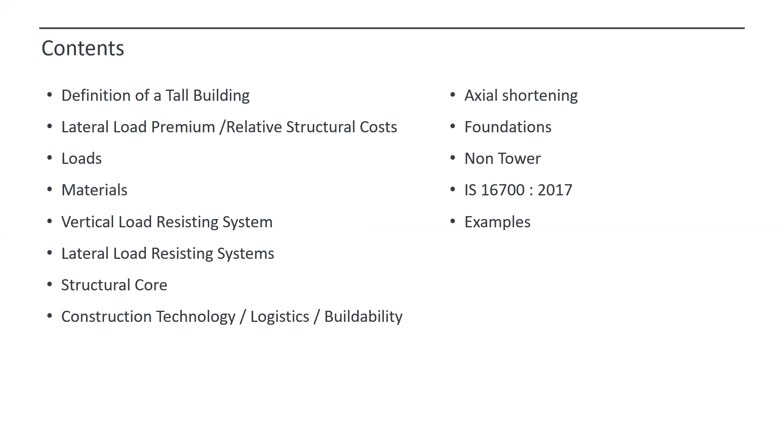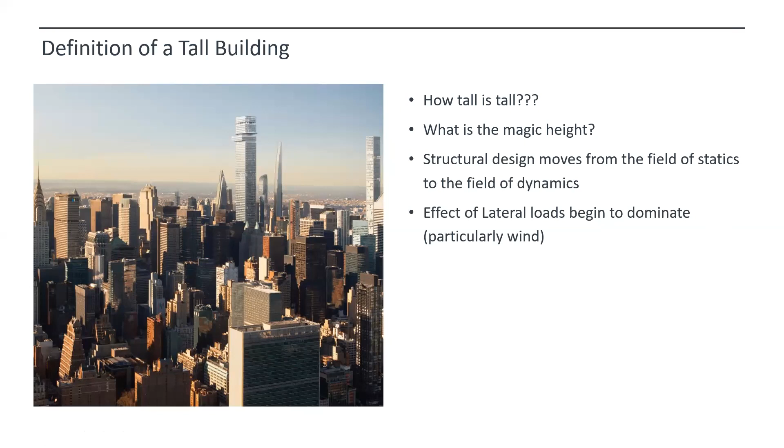In reality, there is no magic height or clear-cut definition in place. It usually depends on various factors, and the most important is the time when the structural design moves from the field of statics to the field of dynamics, and the effect of lateral loads, particularly wind, begins to dominate. That's when we say a building is tall enough.

As you can see, a floor system, whether it's a flat slab, a beam slab system, or any slab, whether it's 10 floors or 50 floors, the cost of that floor system is almost the same at every floor. Whereas the cost of the gravity columns is linear, it increases linearly with height. Whenever stories get added, if n stories get added, n number of times the repeated load gets added, so it's a linear function.

Whereas the overturning moment that happens at the base of the structure due to lateral loads or wind usually increases in proportion to the square of the height, so that's quite an exponential distribution. And the deflections increase in proportion to the fourth power of the height. So that is the impact of lateral load.

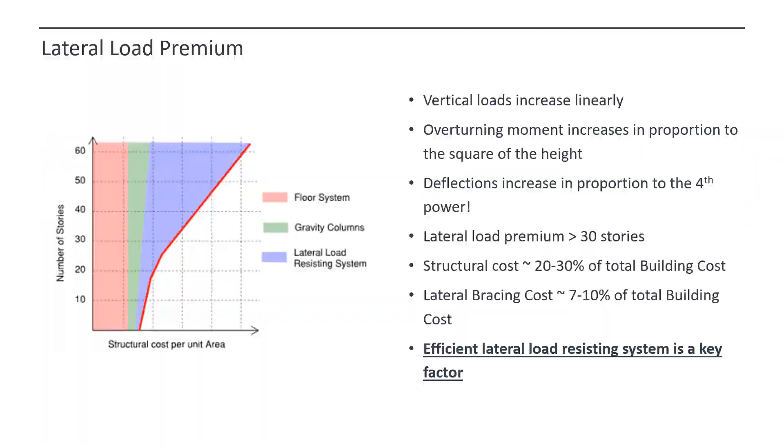Starting with its own gravity load, the self-weight, the finishes, the live loads, we have the wind loads, then there may be some accidental loads. The settlement of soil or the foundations can cause additional loads on the structure. Then we have the seismic loads, or depending on whether the building is built in concrete, the concrete has a tendency to shrink, and this shrinkage, depending on the restraints in the building, may impart some additional loads on the structure. And one is load from temperature.

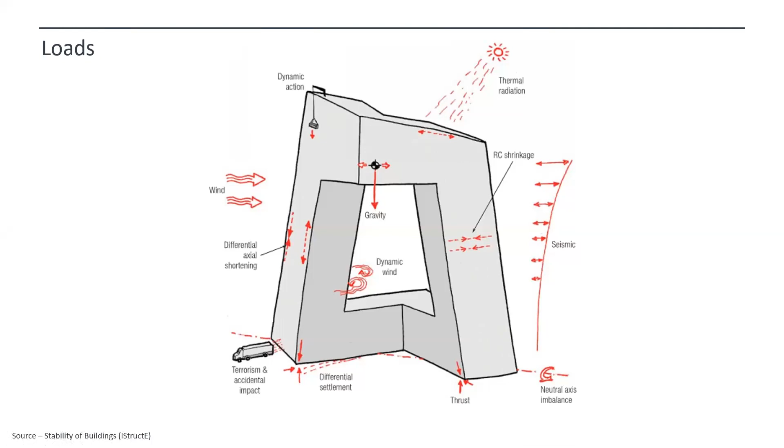There are a lot of loads applied on the building, and as structural engineers, our design codes are robust enough that we design the building for all these types of load envelopes. The critical ones I'll take forward are wind and seismic. So let us understand what happens in a tall tower when subjected to wind.

So usually when the wind flows around a tall building, you have two components. One is the along-wind component, which we call drag, and the transverse component as it flows around whatever shape the building has. There is also a component called crosswind, or the transverse direction.

This kind of loading is really critical, like an additive load, which comes into play when the building is tall or flexible. These wind loads are not only a function of the exposure, they are also a function of the flexibility of the building and the kind of damping we have. These are the two main components critical in a tall building.

So a designer may have a 50-story building with, say, X flexibility, which is stable, or come up with a 2X flexibility, which is still stable, or an X by 2 flexibility, which is still stable. But these two similar buildings in height and geometry, depending on flexibility, interact with the wind differently and attract different kinds of loads.

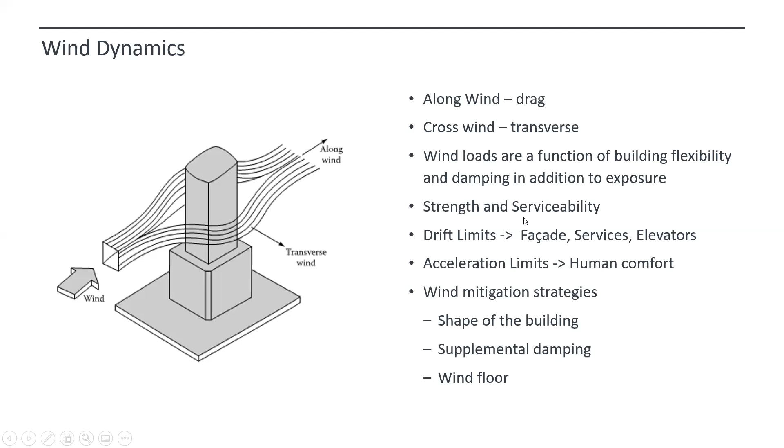Many times, depending on the requirements, we may need various mitigation strategies, and that's where the role of the wind consultant comes into the picture. They guide us on what the shape of the building should be - buildings with different shapes attract different wind loads. They advise whether supplemental damping is required to reduce acceleration, or sometimes, depending on cost-benefit analysis, you dedicate a floor to allow wind to pass through the structure, called a wind floor. However, everything has a cost associated with it, and that's where high-level decisions need to be taken.

As I said, supplemental damping may be in terms of either a tuned mass damper or a pendulum hanging - like a hanging pendulum with huge mass at the roof of the structure - or a damper brace sometimes, or a liquid water tank, which is a sloshing damper. These apparatus usually help in damping out the accelerations.

Generally speaking, a slenderness ratio of the tower in the range of maximum 13:1 is usually considered quite okay, and it may not be required to go for these special measures. This is a ballpark figure, not something set in stone, but generally from experience.

Now, what happens or what is the process of wind load determination? There are two things. One is we always have the building codes - they are analytical or prescriptive in nature, and have always been there. They give good guidance which we can take help of at the concept level. But ultimately, for tall buildings, it is best to go for a wind tunnel procedure.

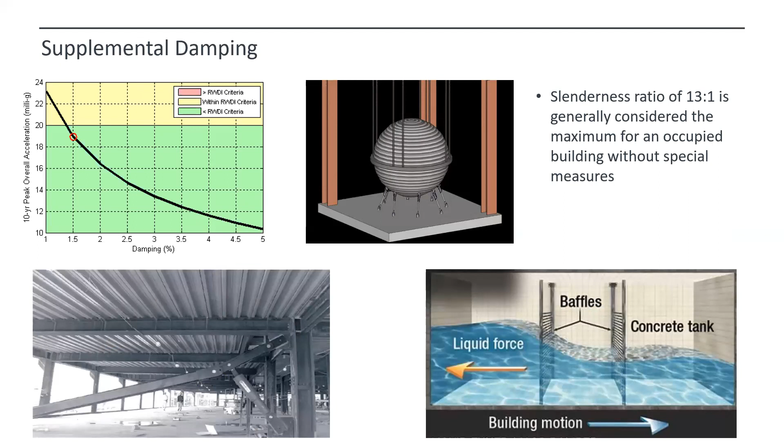A lower return period is a 10-year interval. Return period is a mathematical term, but to make a layman understand, the lower the return period, the more frequent that particular wind or windstorm comes. When we design the building, it will be for a 700 or 1000-year return period - a very rare event, and that's where strength comes into the picture.

In case of a rare event that occurs once in 700, 1000, or 1500 years, the building must not fail - that's the ultimate goal. Whereas when it comes to acceleration, people are living there on a day-to-day basis, and for a commercial complex, people are using it daily. So the winds that happen daily, we take a 10-year recurring interval - a more frequent, common, less intensity wind for which the accelerations or motion perception has to be checked.

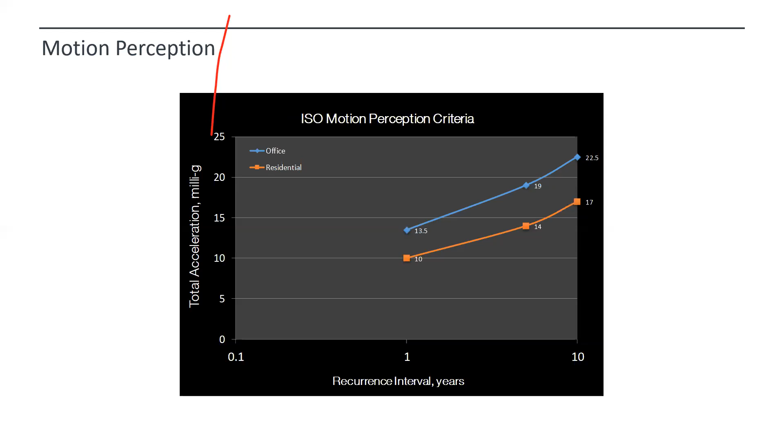But keep in mind that in the cruciform shape, there are areas that are missed out which are filled up in the square shape - you're essentially losing sellable area for almost similar wind load. This is described by the perimeter to area ratio. If you're focusing on the economy of a tall building, the shape has high impact - cruciform shapes have limited sellable area for the same wind load, so a lesser P by A ratio is usually desirable.

Apart from that, if buildings are really tall, there is a concept of aerodynamic shaping that comes into play.

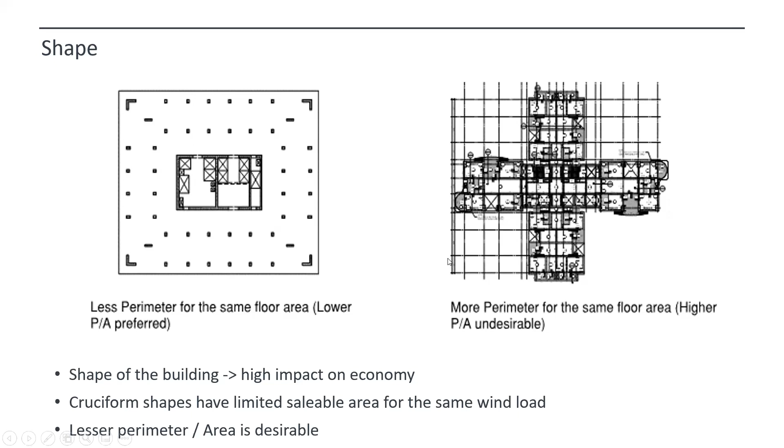So a building, a square building with sharp corners, or whether the building needs to be given chamfers, or whether any balconies are there, whether the balconies have to be chamfered, or if any openings have to be given in the balconies - these discussions need to happen with the wind tunnel consultant. They give good guidance as to how the shape of a building, making small adjustments in the exterior shape, roughening the edges or smoothing the edges, affects how the wind loads get impacted. So these are the discussions we usually need to have with the wind tunnel consultant.

They provide us wind forces for the cladding. The cladding needs to be designed for higher pressures than what the building is subjected to. They also provide sensitivity studies - so the graph that I showed earlier, like whether we want to increase or decrease our flexibility, or whether damping needs to be increased or decreased. These are the sensitivity studies they do for us.

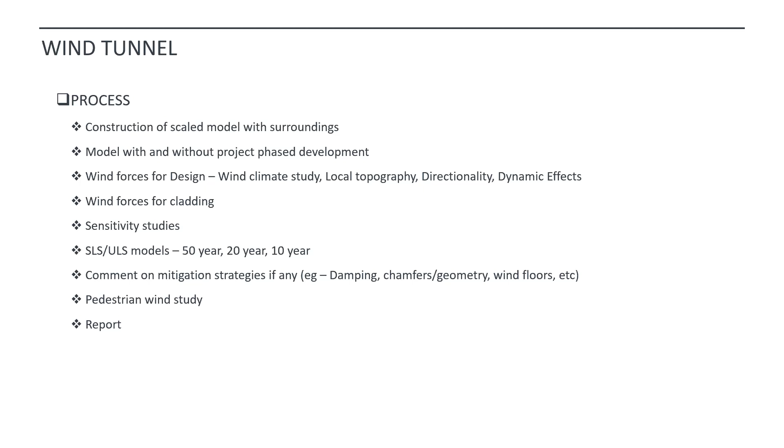They provide us loads for different recurrence periods - 50, 20, 10, even higher, 700, 1500 years. They comment on mitigation strategies, as I talked before, whether any extra damping is required, whether chamfers need to be given, whether any particular geometry change has to be done, whether any wind floor has to be incorporated, and so on. And also they provide results of pedestrian wind study. Sometimes you have these high rise podium floors where you have amenities exposed and people walk on it, and a lot of wind eddies are formed there due to setback between the tower and non-tower. That's when the pedestrian comfort study also comes into play.

Moving on to seismic loads - one thing to understand, and this is a very basic slide from an understanding point of view: earthquakes do not really apply any external forces. These are internally generated inertial forces. As the ground moves, the building follows its movement, and whatever is the mass of the building, heavier the mass of the building, higher is the force, as it's an inertial force. Everybody knows Newton's law of motion - mass into acceleration. So higher the mass, higher the force.

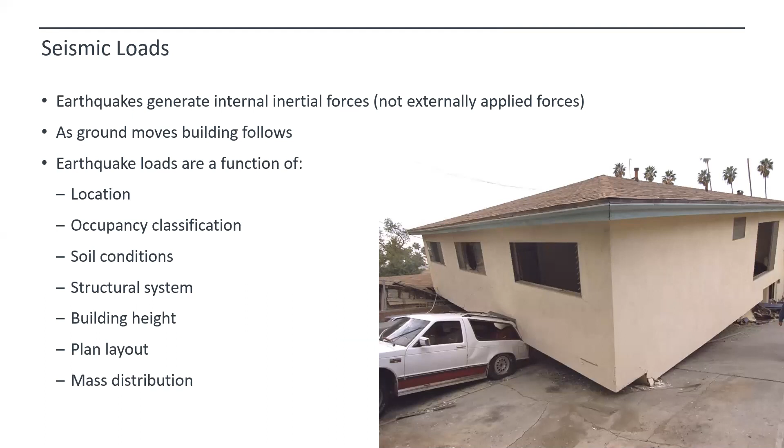They are a function of the location, whatever is the occupancy class, whether it's highly occupied or not, depends on the soil conditions, what is the structural system in place, the height of the building, the plan layout, and the mass distribution. The whole objective of seismic design compared to wind design is quite different. In seismic design, the whole objective is to prevent collapse of the structure due to extreme high earthquakes and preserve life safety.

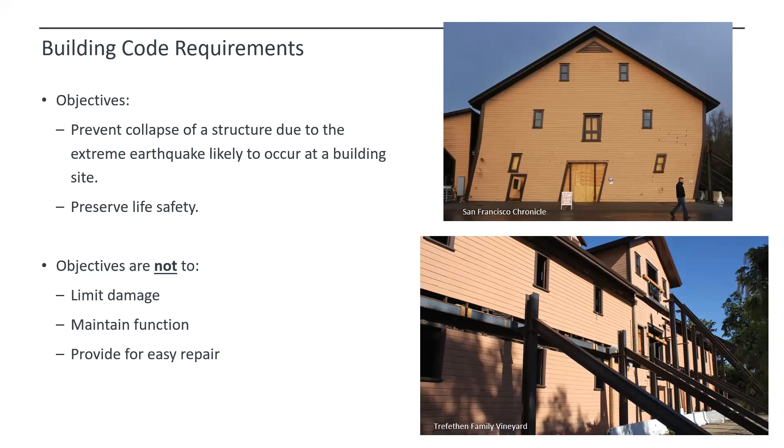That's when more and more advancements were done in concrete technology. Really high strength concrete could be made, and also concrete, if you see, is a readily locally sourced material, and construction can begin immediately - it doesn't have a lead time associated with it as compared to prefabricated materials like steel. That is the advantage. And then later there was a mix and match, or marrying the two trades, the steel and concrete, and that's when even composite buildings came to be used as tower heights kept increasing. So it's like using the best of both worlds, and that's what the historic data tells us.

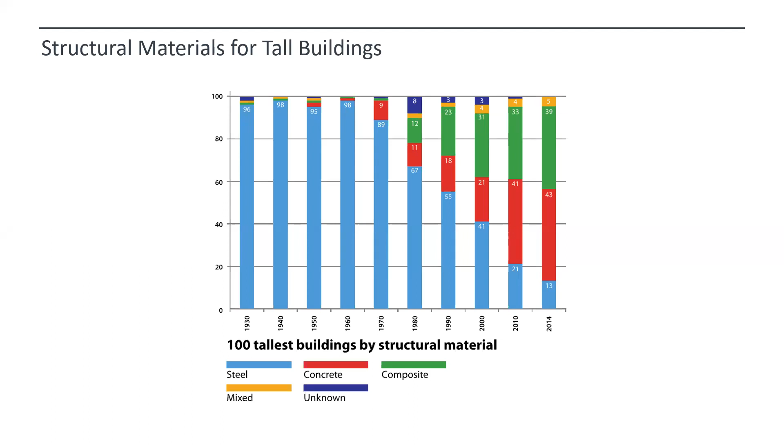Regarding concrete and reinforcement, there are a lot of changes that have come. In the 1960s, it was just 60 KSI reinforcing that was allowed by the code. 60 KSI, somewhere like on our Indian counterpart, it is like grade FE415.

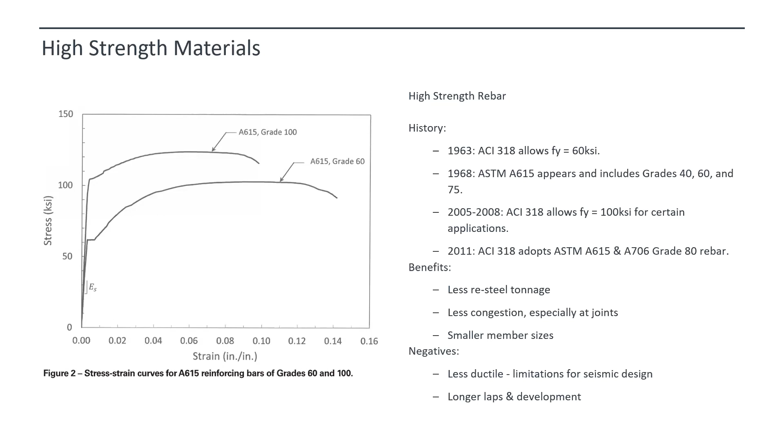American codes now allow high grade reinforcement up to 100 KSI, which is close to 700 megapascal in SI units. The obvious benefits are reduced member sizes, less tonnage, and reduced congestion. The negatives are that these high grade steels are less ductile, so for seismic design they have some limitations and need longer laps. But nowadays everybody uses mechanical couplers, so even that is taken care of.

In case of concrete, we now have really high grade concrete. Earlier there was M25, 30 grade, that is cube strength, and that was really common. Now there is facility to even get high grade strength up to 70, 80, and even 100, at places where the labs make these cube tests, they test it, and we can use it.

This has really pushed the limits for tall buildings. And wherever the tall building is constructed, it is obviously determined by whatever is the local availability of aggregates.

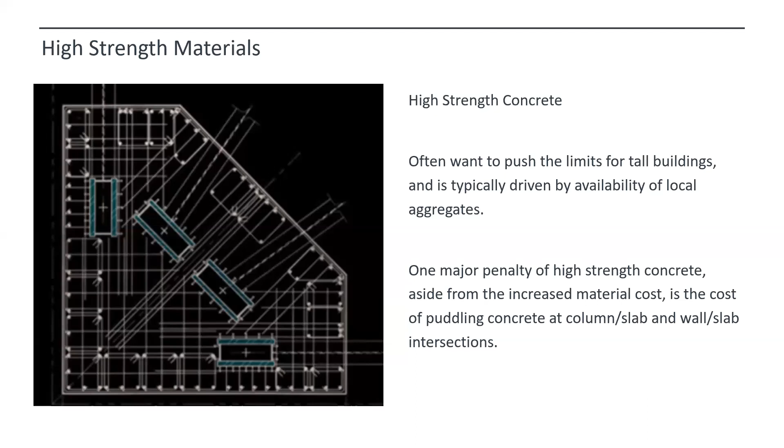Only one penalty in case of using high grade concrete is the codes usually limit the ratio of the concrete grade of verticals and the concrete grade of floors. So on site, they need to puddle extra concrete around the vertical elements, and this takes some time. But anyway, these logistics all need to be worked out in the concept stage, taking into account all stakeholders of the project.

If you look at pros and cons of each, I'll come to that in the next slide. Flat slabs or flat plate with drops have really slim floors. The advantage is the formwork or shuttering material is very simple to construct, ease of constructability. They are quicker to construct, they lead to lower story heights, and also there is flexibility of partitions.

On the con side, openings in slabs could be a concern. These slabs tend to deflect a lot, so there are quite rigorous checks that need to be done for the deflections. But all in all, they are quite popular in our country now.

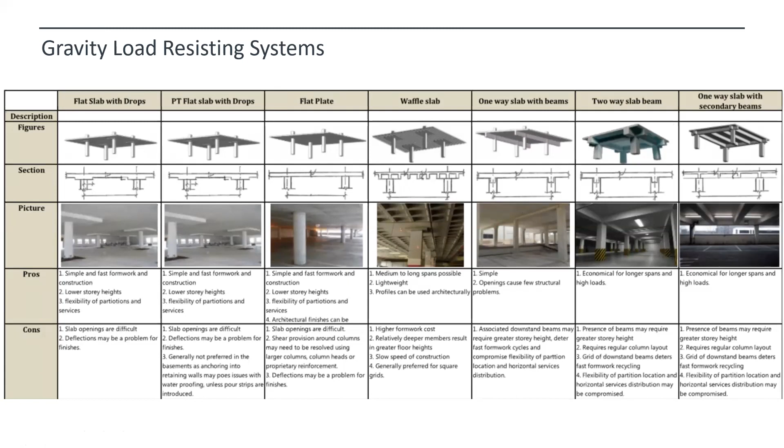So when it comes to planning a floor, and if it's a tall building, the whole focus needs to be on how do we make it easily buildable. The grid lines need to be as simple as possible. I'm not talking about just squarish or rectangular grid, you can go for any kind of grid, but it needs to be simple and clearly defined, avoiding things like re-entrant corners if possible, though we can work around that.

The whole focus has to be on reducing construction time, and that is where an architect can sit with the structural engineer, and together they can do wonders. I'll give you a brief example: a single day, usually when we go with flat slabs without any beams, we can construct single floors within 3.5 to 4 days, as opposed to 7 to 8 days with beam slab construction. So a single day saving in a slab cycle, say for 60 stories, means you are finishing the project 60 days in advance, that's like 2 months.

Just imagine the amount of interest that the developer is paying, that person saves on that interest when the building is delivered 60 days in advance. And this itself might lead to 20-30% savings in the structural cost of the floor.

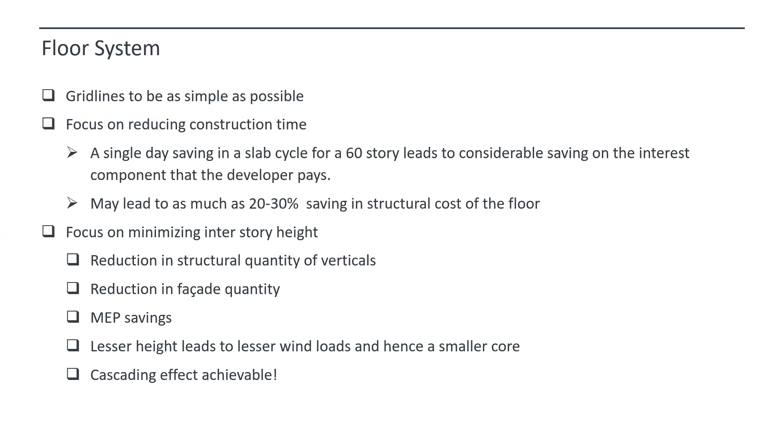So the cascading effect is possible in a good floor design. Ideally, from the strength point of view, although the lateral system needs to be efficient, the floor system is equally important and should not be overlooked. A well-designed, efficient floor system has a multiple cascading effect on the cost of the project, and you can do wonders by having a good floor system in place.

Moving on to the lateral load resisting systems, I'll briefly take you through what is the function of a lateral load resisting system.

Basically, you have a gravity system in place. The gravity system needs to be braced, and that's where the lateral load resisting system comes into play. They provide stability to the frame that carries gravity loads, and resist the wind, seismic, and soil loads. This is required in each direction, and not to forget, even in the torsional direction. The building not only needs to have enough resistance along the X and Y axis, but also rotationally it needs to be stable. My further slides will talk about why this rotation is also critical.

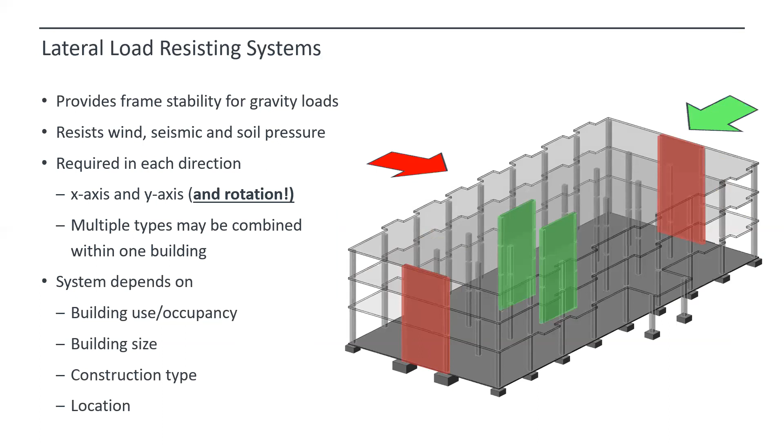We can mix and match multiple types in the same building, and obviously the system we take depends on the use and occupancy, the building size, the type of construction, and location.

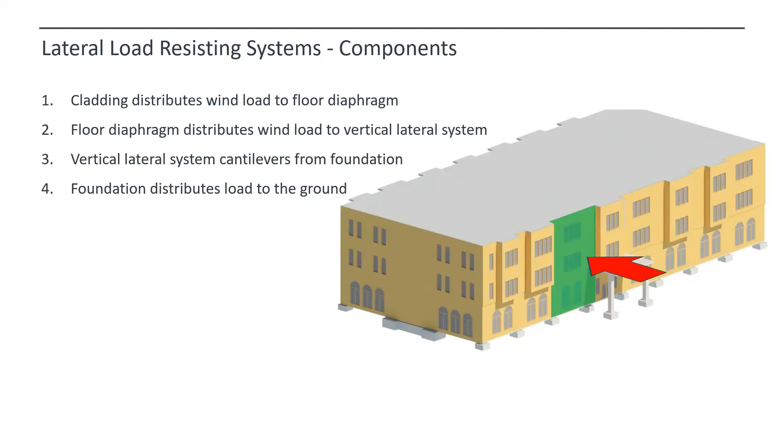For a layman who doesn't do structural design: whenever you have a wind load, the wind load comes on the cladding. The cladding spans between successive floors, and distributes the load to the floor diaphragm, and the floor diaphragm in turn distributes the load to the vertical resisting system in place. These act like cantilevers from the foundation. In this example, I've made use of these red shear walls - that's how the load reaches the shear walls. So the load applied on the cladding, via the floor diaphragm, reaches the shear wall, and the shear wall in turn distributes the load to the foundation and then to the ground.

The selection of lateral system affects the magnitude of seismic loads, and what kind of stiffness and drift limitations are imposed on the building.

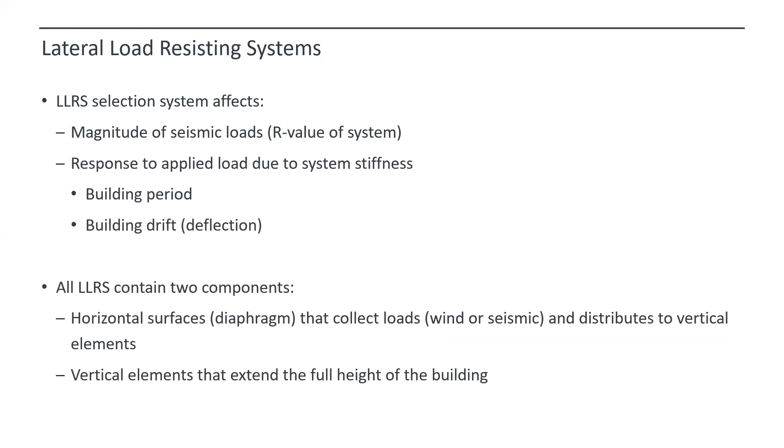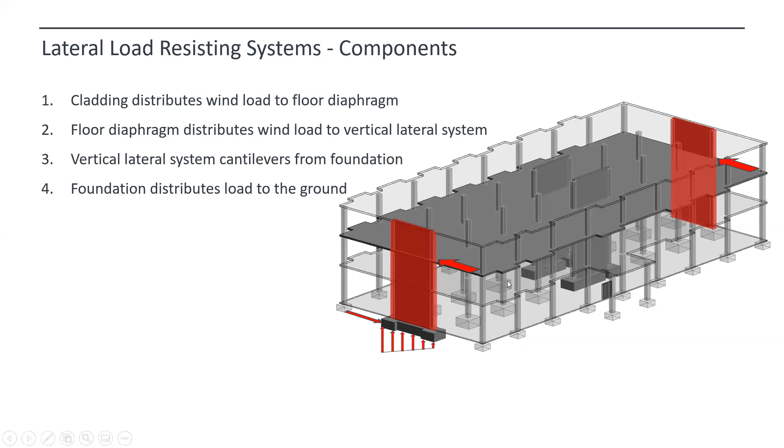More importantly, it's not just the vertical elements like the shear wall or frames that are the lateral load system. The horizontal diaphragm - these slabs - is also important because it distributes the load. Without the diaphragm, the load won't go onto the lateral system. Many times, we receive plans where there are a lot of openings in the diaphragm. If there are substantial openings in the diaphragm, the load won't reach the lateral system, in this case the shear walls. So this needs to be known - the horizontal diaphragm is equally important.

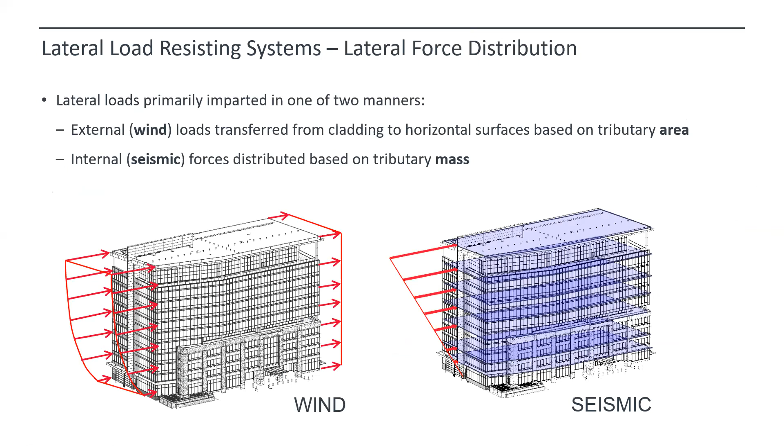The primary difference between wind and seismic loads is that wind loads are externally applied loads transferred from cladding to the diaphragm based on tributary area, whereas seismic loads are internally generated inertia forces based on the mass of the building.

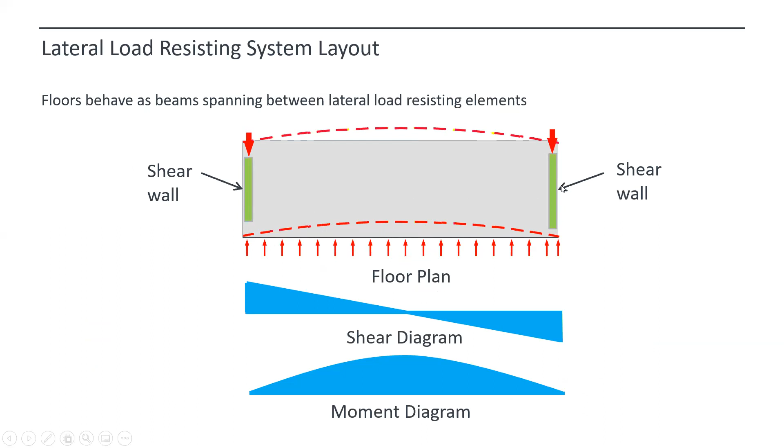To understand a basic level of how a diaphragm works in plan view, it's analyzed like a deep beam. It flexes whenever there's a lateral load coming onto the floor plan from wind, flexing between the lateral load resisting elements, and that's how it transfers load to the shear wall. If you provide openings, this load path is broken, and the load won't go to the shear wall. This is an important element to understand.

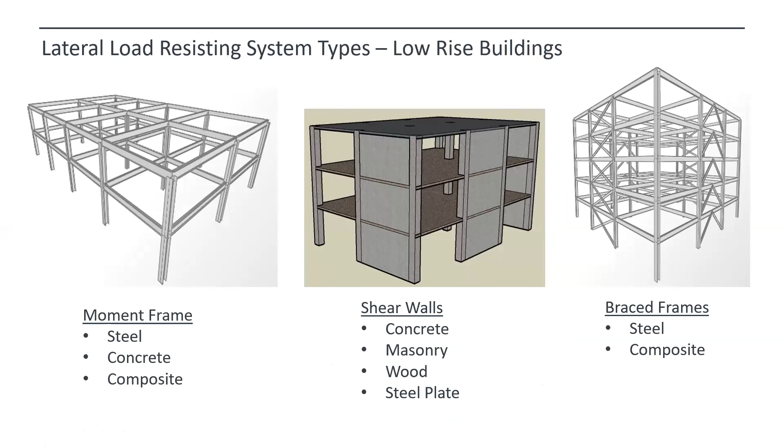Let us look at the various lateral load resisting systems. For low-rise buildings, we have moment frames in steel, concrete, or composite. We can have shear walls, again in concrete, masonry, wood, and steel plate, or brace frames in steel or composite.

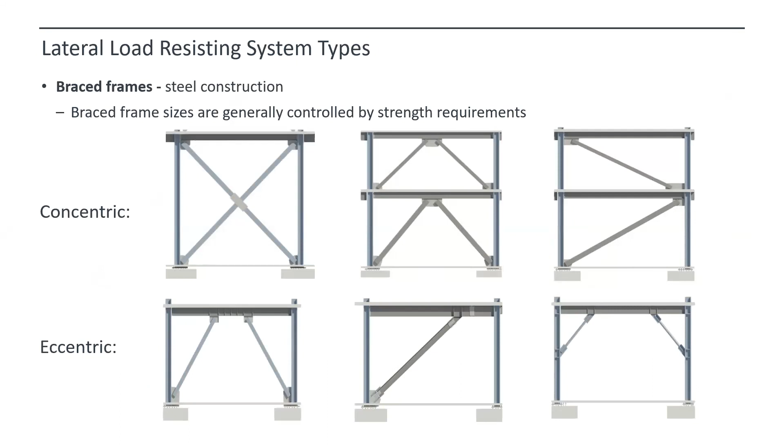In steel, brace frames come in two forms: concentric brace framing and eccentric brace framing. Both can work depending on the seismic zone and type, and the sizing of this is usually controlled by strength.

Moment frames are essentially rigid frames. The whole strength and stiffness of that frame depends on how rigid the joint is, so this connection is really important. The stiffer the connection, the stiffer the frame. And in concrete, steel, or steel composite, it can be done.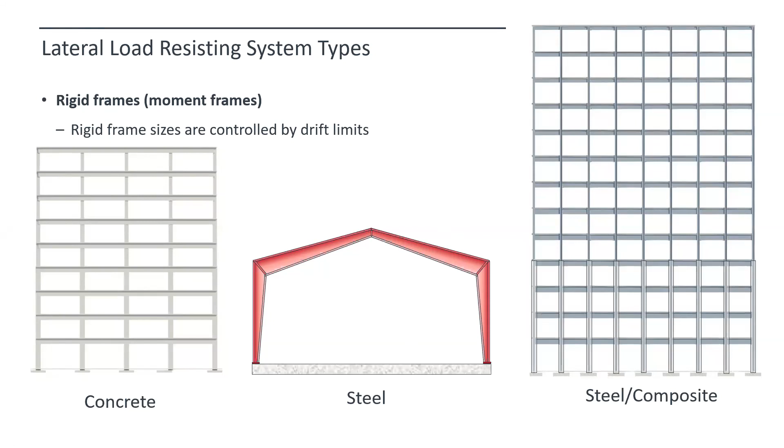In concrete, we have typical details that we need to follow at the joint that essentially maintain the 90-degree angle at the connection and maintain the rigidity. In steel or composite, it's a combination of welded or bolted connections with the flanges.

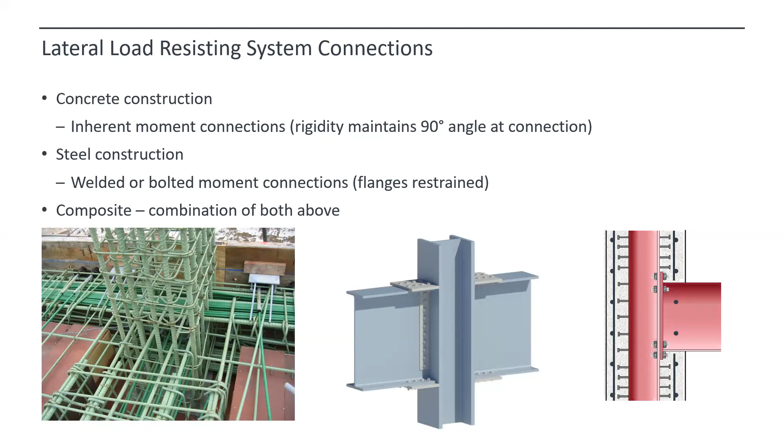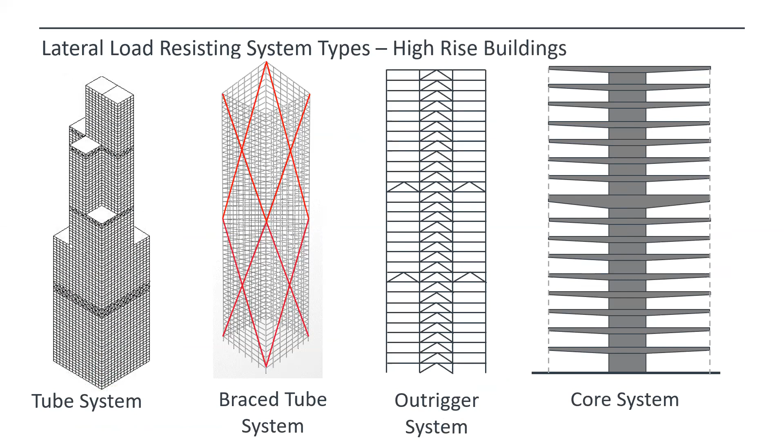For high-rise buildings, it's a further, post-graduation from the basic systems, but the concept remains the same. You have tube systems, braced tube systems, outrigger systems, and core systems. A core is nothing but shear walls—all shear walls coming together form a core, and we'll see that in the next slides.

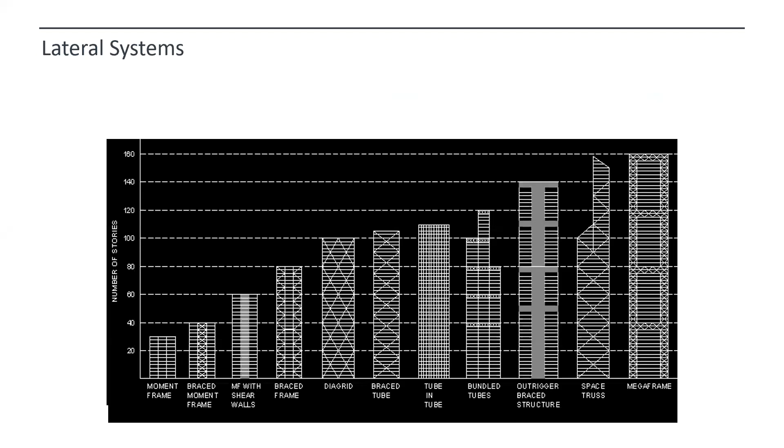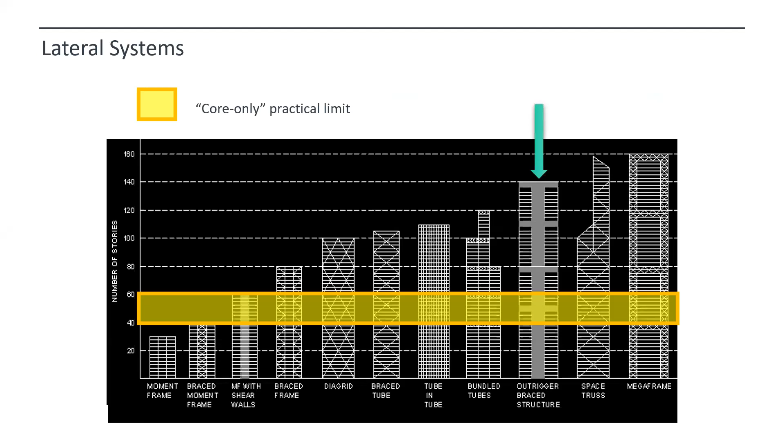This is a good image that shows what kind of systems are usually followed for buildings of different heights. Moment frames work between, say, 20 to 40 stories. Moment frames with shear walls work up to 50 to 60 stories. The core zone, between 40 and 60 stories, is usually the practical limit. Most buildings around us either have a core, or if taller, have the outrigger brace structure.

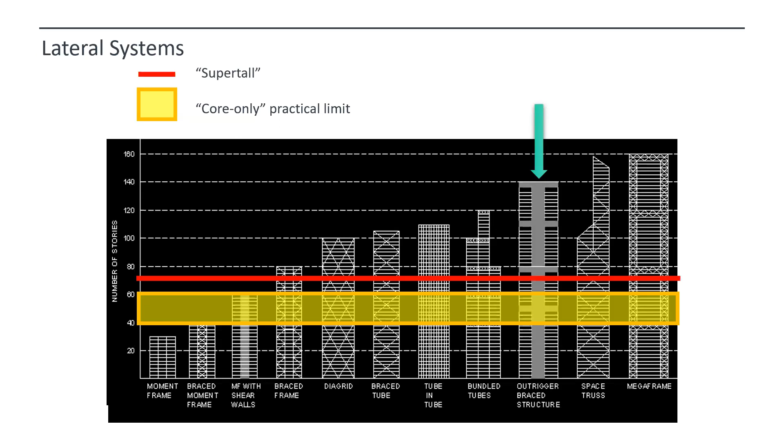So I'll talk about it in the slides further. What is an outrigger? What does it do? The red line is somewhere where buildings are classified as super tall.

In an outrigger system, we have a central spine core, and at fixed levels we have floor-deep or multiple-floor-deep beams, which are either walls or bracing, tying it with the perimeter columns. When the area or extents of the core are not enough, connecting it with these walls increases the effective base width that we engage—recall the slenderness ratio of 13:1. Essentially, we are engaging even the gravity columns with the core, so the whole width of the structure now resists the lateral loads.

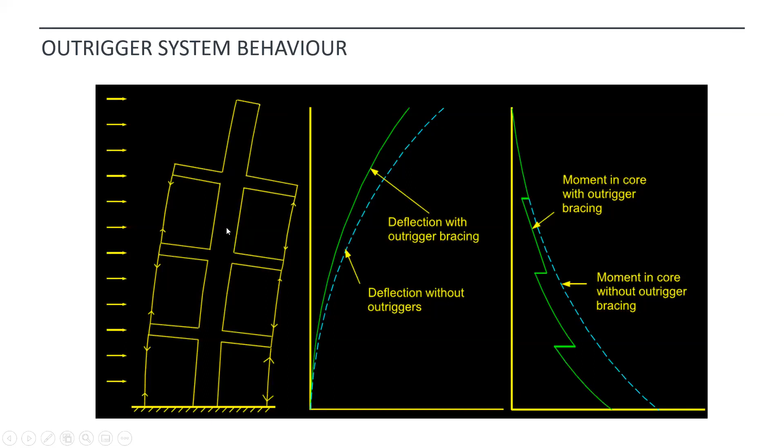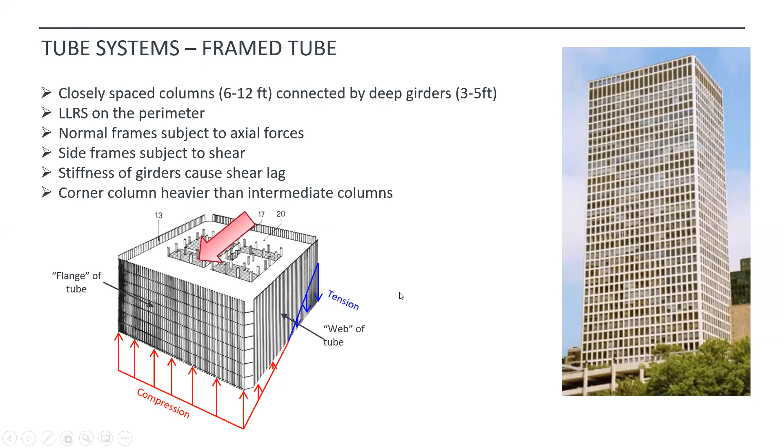In this case, the entire lateral load resistance is concentrated on the perimeter of the tower. Whatever the wind load, you have compression on the far face and tension at the rear face. The stiffness of the girders causes shear lag, and usually the corner columns are heavier than the intermediate columns.

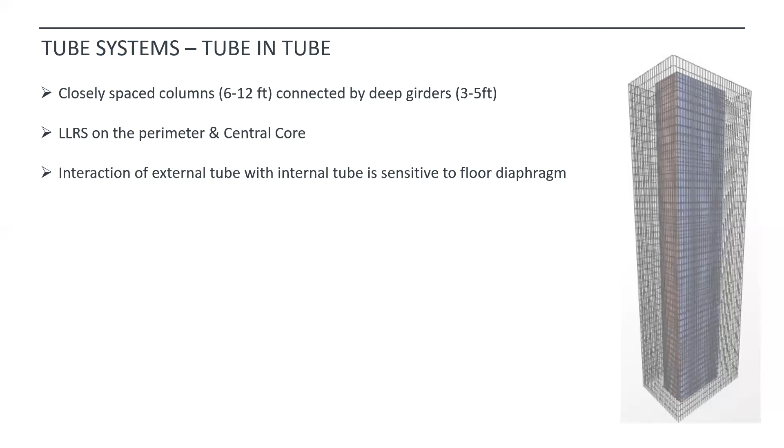Another system is a tube in tube. In this case, not only do we have a perimeter tube, but we also have a central core. The central core and the perimeter tube act together - they interact, and this interaction between the external and internal tube depends on the type of floor diaphragm between the two.

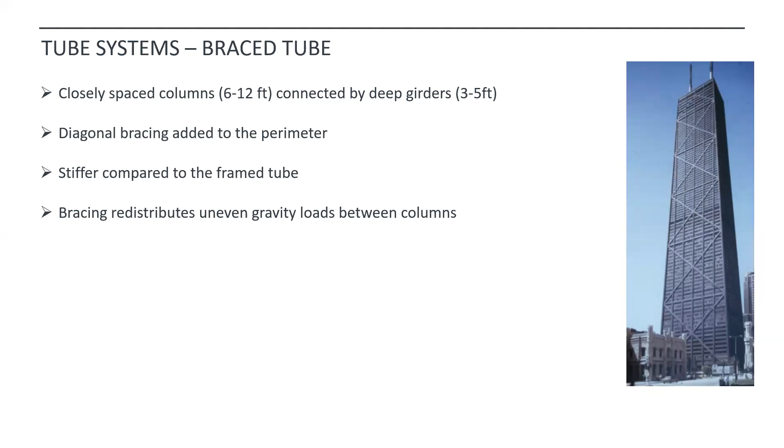This is another variation, where if a tube or tube-in-tube is not enough, one can go with a braced tube. The braced tube has closely spaced columns with diagonal bracing added to the perimeter. It's further stiffer, and the bracing even redistributes uneven gravity loads onto the columns. This is a bit difficult to apply in residential buildings, but in commercial buildings it can be done. The architect needs to know there are ways of visually expressing these diagonals - if achievable, you can do wonders with this system.

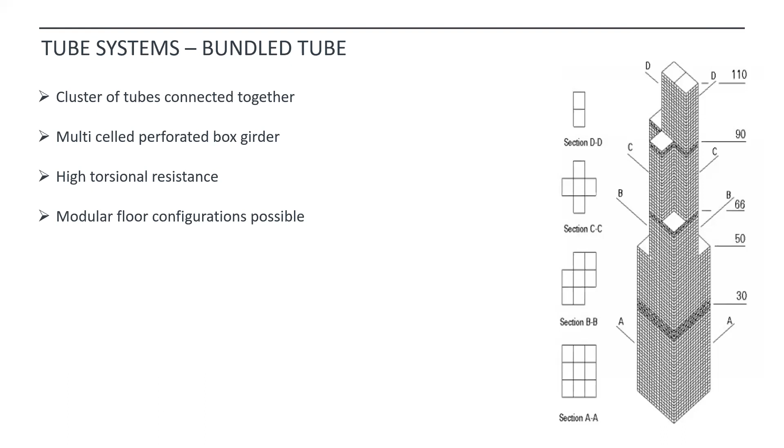The last, at the top, I'll call it a bundled tube, where a cluster of tubes come together and connect, as shown. At different levels there could be different setbacks - imagine it's like a multi-cell perforated box girder. Such a system has very high torsional resistance, and there's modularity possible in functional planning. These are usually seen in super tall or mega tall buildings, not in the commonly occurring tall buildings.

Now, having gone through the various lateral systems, let's look at the structural core and why it's important. First and foremost, it's a place where a lot of time and money is spent, so we need to be efficient in planning this core. The size and location is generally dictated by the architects - wherever the services are and how the space planning goes, that's where the core is possible. There will be a few initial inputs from the structural consultant on this core.

Now why is this important? Let's look at the logistics of the net lettable area. If you have a structure with a given envelope or fixed area for the floor plate, then floor efficiency is judged on the net lettable area - what a developer gets from the space that is lettable or rentable. In many building bylaws and guidelines in different countries, including ours, the area occupied by the core is either not considered or only partially considered in these calculations.

So obviously, you require a core to stabilize a tall tower, but then you're unable to sell or count that area as a selling factor. So the whole target is to minimize the core area and maximize the net lettable area, and all this needs to be done within the available envelope of the building. These are the constraints, the typical standard constraints of our tall building problem.

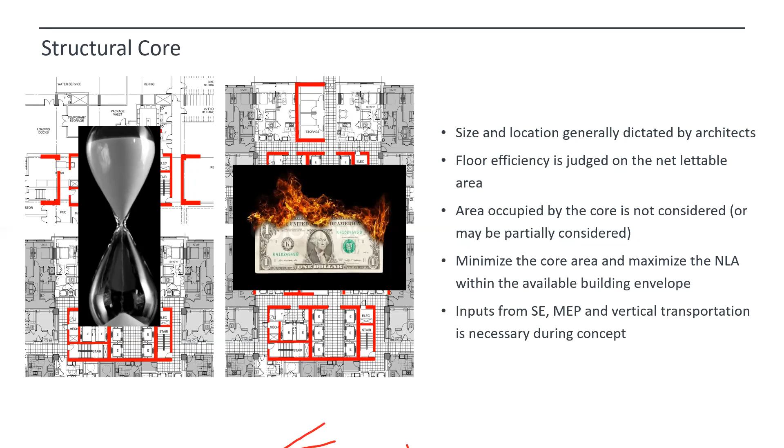If one tackles this problem at the very start, the project is a huge success, not only from the building point of view, but also from the commercial viability of the project. Ultimately, as a team, we are responsible to make the project commercially viable. If the project is not commercially viable, there's no point doing that project. So at the very early stage, it's necessary to take inputs from the structural engineer, the MEP, and the vertical transportation for this.

This is a brief, enlarged image of the typical structural core. That's how it looks. You have all these banks of elevators that are required. The staircases are planned here. Pressurization shafts are all going into the core, or services go in and out from this.

And that's how a core looks. Now, if you see all these cores, they are essentially shear walls. So shear walls are connected together with some fusing elements. I'll talk about these elements that form the core. Now, what are these elements? These elements are link beams, these small elements that I've shown here between the pink lines.

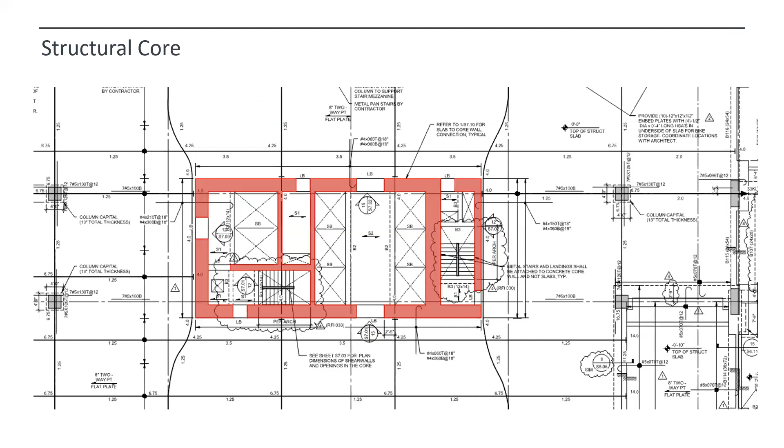These are beams, and usually they are the Achilles heel. A core can be only as strong as how strong that particular link beam is. So imagine you're tying this core. The wall is not continuous, right? These are like punctures or openings in the core. And the structural element, or the link beam as we call it, the strength and the stiffness of the link beam is going to dictate how strong or weak this core is.

So imagine two extreme cases. Say the link beam depth is something like 20 inches, or 24 inches deep. As opposed to that, consider the link beam depth as same as the slab thickness. So if I'm having an 8-inch slab around, you have the link beam depth same as the slab. So the two extreme cases: on one side, when the 8-inch slab is there, the link beam is essentially not a link beam. It doesn't link the cores, and each wall then acts individually.

And we don't want to have that. The whole idea is to increase the extent of the core. So the deeper the link beam, the more efficient the core is. That's what I meant, that the stiffness and strength of this link beam will usually go a long way in dictating the core efficiency, from a structural point of view.

The MEP sleeves, if any, need to be strategically located. It's easier to give sleeves in beams that just take gravity loads. But when you have this core as the lateral system, there are certain target areas where we allow sleeves. If that is not allowed, the architect and the MEP need to plan on getting the sleeves from somewhere else, probably through the wall instead of the link beam.

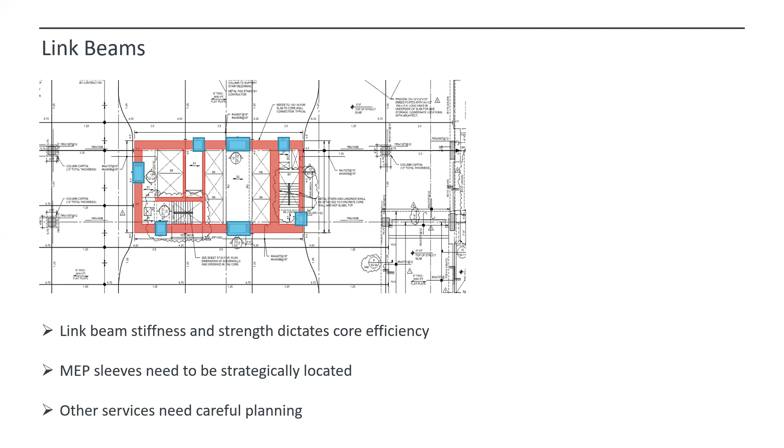Other important aspect is the buildability of the core. As I said, improving on that slab cycle time and how to manage the material involved in building that core is critical.

There are various systems in place, like the jump form system, the slip form, or the alu form system. In a jump form, as I've shown in some images, you have 4 floors enveloped with a cage of shuttering and false work, and this whole system jumps hydraulically level by level, or 4 floors at a time, and the slabs get cast in one go across multiple levels.

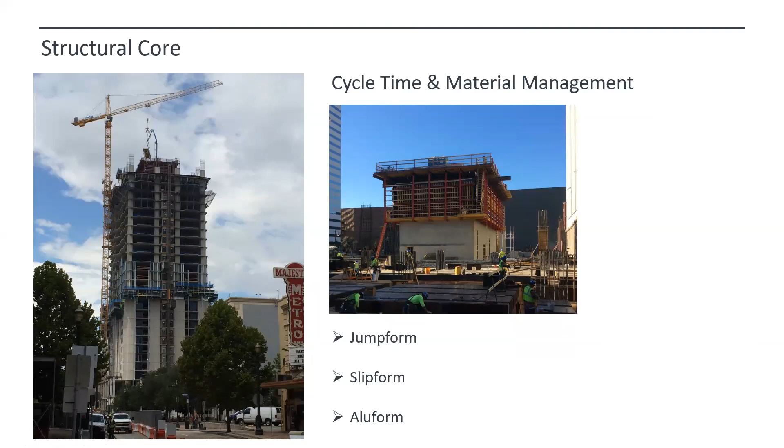In slip form construction, although it's not that traditionally happening now, this particular cage goes ahead at a very specific rate per time duration, and it goes on climbing. Alu form is something more prevalent these days; various companies such as Mivan sell this, and there are other companies also that do aluminum formwork. It's a system of formwork where all the walls, slabs, and beams are cast in one go. The whole floor is back propped, and the whole shuttering gets moved to the other level in 3 to 4 days.

Now let us focus on some aspects that are really specific to tall buildings. It's a bit technical, but let me tell you how it affects architecturally. Usually, as we go tall, there is a sustained load acting on all verticals, so ultimately each vertical element deforms.

This deformation depends on the area of that element. If the core has a very large area, it deforms at a lesser rate, whereas the perimeter columns have a lesser area and deform at a higher rate. So a 120-story building, when it deforms, will look something like this enlarged image.

Then corrections need to be applied, because obviously all the facade and MEP components are fixed in size, right? So all these need to be taken care of.

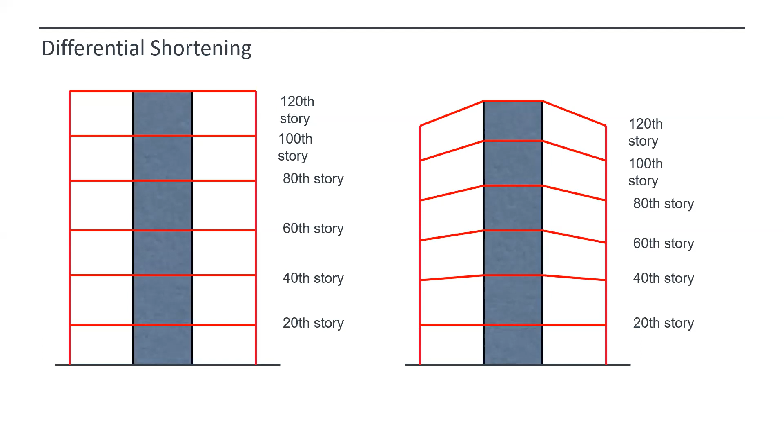So what we do is we usually do a rigorous analysis and give a compensation to these floors. The contractor takes our compensation data and builds each floor at certain levels up, assuming that after the whole tower is constructed, it will settle back to the planned level.

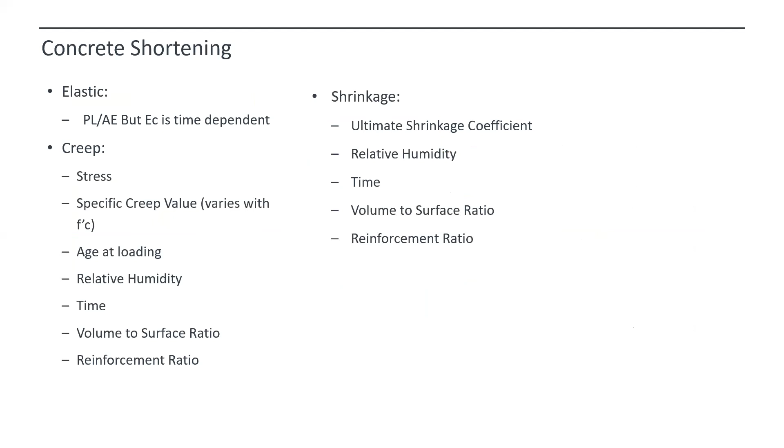This is a highly technical side, but to cover this aspect, it's dependent on time, creep, age at loading, relative humidity, volume to surface ratio, reinforcement ratio, and also shrinkage of concrete.

The high impact decision at planning time is to keep columns as far away as possible from the core, and to mobilize equal loads on these vertical elements, because no matter what you do, axial shortening is always going to happen. The whole idea is that there shouldn't be much relative axial shortening between two close elements. That's the whole goal.

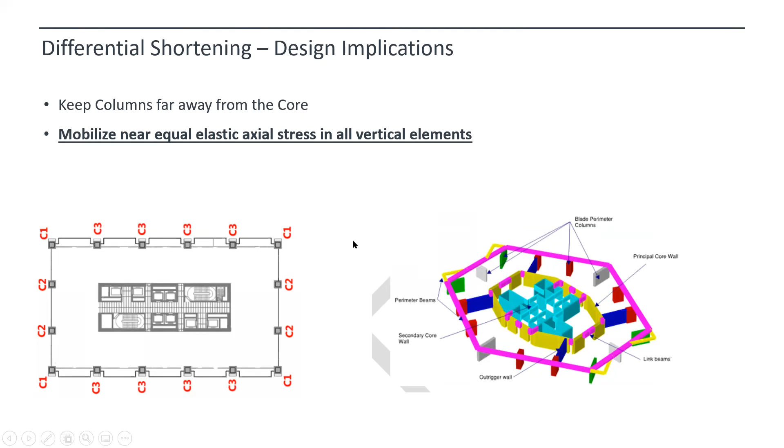A brief talk on the foundations. Foundations of these tall buildings are typically either a mat resting directly on firm strata, or piles. The foundation thickness varies anywhere from 1.5 meters to 5 meters, depending on tower height, spans, and the strata encountered. These are really thick concrete sections, like 4 and 5 meters.

It's a very thick section, so our concrete specifications need to cover it. The specifications should cover the maximum allowable temperature and temperature differential within the mat, because heat of hydration plays a role and cracks are seen. We need to avoid that.

Sometimes ice flakes are used to cool down the concrete. Special curing methods need to be adopted, and the mix design is adjusted to accommodate use of fly ash, slag, and microsilica.

Usually you have MEP services, and that's where we sometimes give 300 mm to 500 mm of plum concrete or lean mix concrete over the top of the foundation, so the MEP contractor can come later and bury their services through these. So you need to pay attention to the top of the foundation.

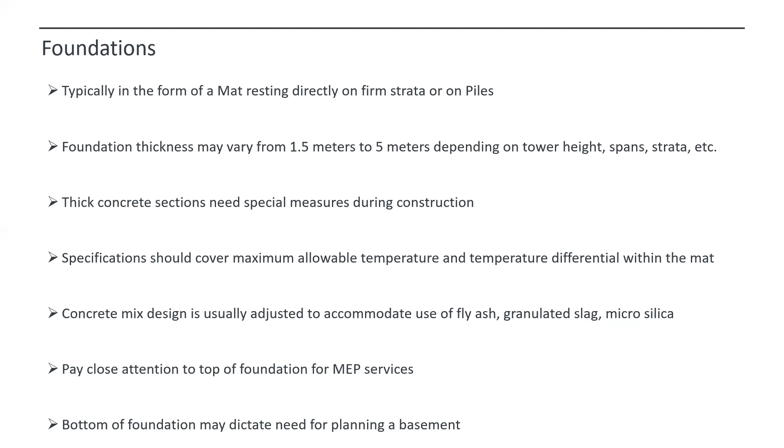Sometimes the strata is such that you need to excavate really low or excavate more. If that's the case, the architect and developer can take this input from the structural engineer and think of planning a basement. If you're going down, sometimes it's feasible to accommodate services or parking. So as long as the plot dimensions allow it, all these points can be considered in the concept. This was all about the attention needed on the tower.

But rarely are towers standalone. Usually they are accompanied by the non-tower, or the podiums, extended podiums, and basements. So sometimes whatever decisions we take in the tower also affect the non-tower. We'll see what that is.

The planning of the non-tower usually depends on the type of development. One may have a single tower with an associated podium and basement, or a cluster of towers in a gated development with associated podiums and basements. That's where you need to watch out for expansion joints or movement joints, because say if you have a 200 meters by 200 meters plot with multiple towers, usually there is a huge study on whether to give an expansion joint or a movement joint.

Expansion joints are best when placed every 60 to 70 meters. They relieve thermal stresses or stresses due to shrinkage and other constraints. However, treating expansion joints is usually an art, and if good skilled local workmanship is not available, one would then go for connecting the non-tower together, but there are cost implications of that.

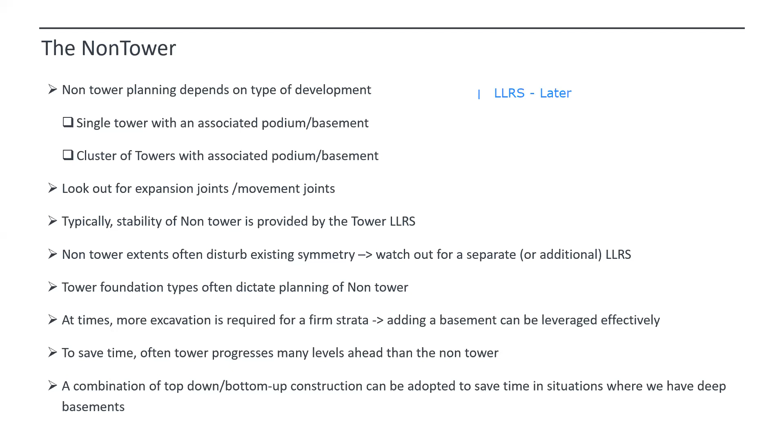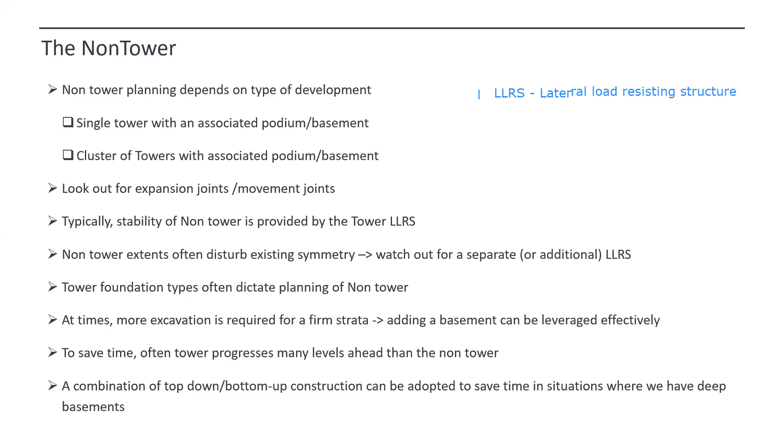If you have really deep basements, you can also use a combination of top-down construction and bottom-up construction. It's something regularly done in regions such as Hong Kong and China, where basements are like 4 or 5 stories, and they do simultaneous top-down and bottom-up construction for the non-tower and tower respectively.

So any layman in this field who need not have a structural background can go through the code, and there are certain prescriptive provisions—if you follow them, the building will behave well. Some of these prescriptive guidelines include what the maximum height limits are.

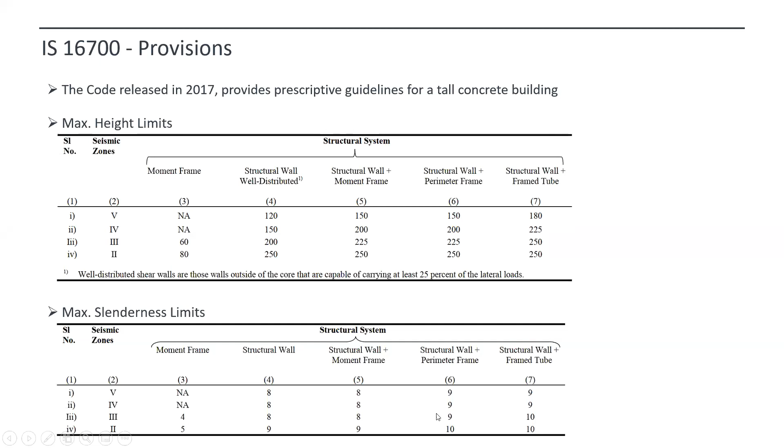Another aspect was the aspect ratio, or maximum slenderness limit, which I talked about earlier. So for different systems, what is the maximum permissible aspect ratio or slenderness limit? The code talks about it, somewhere between 4 and 5 for moment frames, to 10 for a structural wall plus framed tube.

Other than these, there is also good guidance given on the maximum allowable openings in a floor diaphragm. As I said, the floor diaphragm is critical because it carries the load from the wind and distributes it to the lateral elements. Now if someone gives a lot of cutouts and big openings for MEP, elevators, or staircases, one needs to be wary of the maximum allowable opening in a floor diaphragm. The code gives good guidance on that.

There are good guidelines given for acceptable irregularities in the code, and what penalty needs to be paid if you have these irregularities. Another aspect is also the demand for a perimeter frame. So in some of the examples I'll present later, I'll tell you what a perimeter frame does.

But before looking at the perimeter frame, let's understand why torsional stiffness is important. First and foremost, when a person perceives what kind of resistance is required, usually it's the X and Y directions where you demand the lateral load resisting systems like walls or moment frames. But torsional resistance dictates the ability of the tower to twist, and twist is something that needs to be avoided.

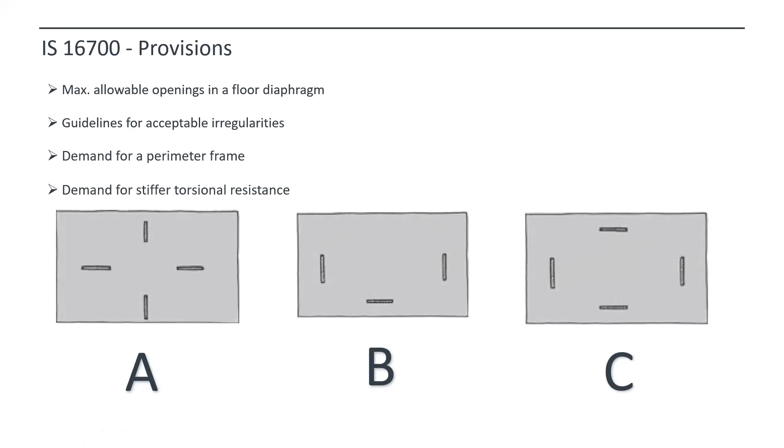And if you see item C, it's more torsional, it has the highest torsional resistance, where you have two banks of walls separated by a good distance. This was in short about torsion. I'll also come back to this torsion issue again in one of the examples that I've shown.

Let me take you quickly through three examples from different projects. This is a hotel building which is in a high seismic zone. It's 37 stories above grade and 3 basement levels. The total height is around 450 feet plus from the grade to the top. There is a marquee feature at the top. Typical floor height is 10 feet.

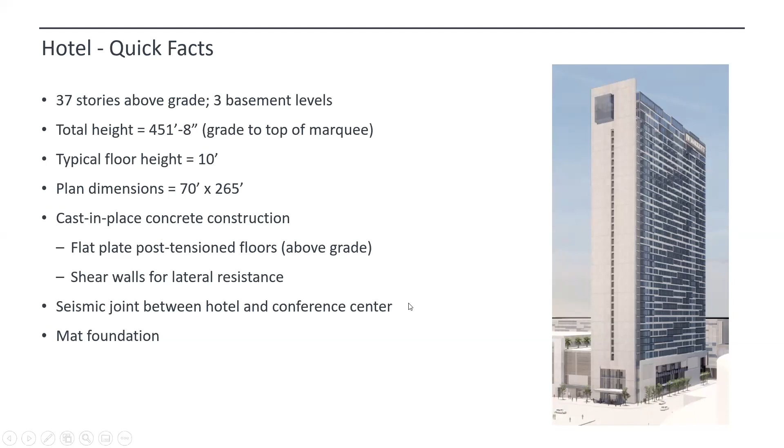This is a really slim floor. If you see the floor to floor height of 10 feet, there is a huge optimization that's gone into the floor slab. The plan dimensions are roughly 70 feet by 265 feet. This was a cast in place concrete construction with flat plate that are post tensioned, and shear walls are used for lateral resistance. It's on a mat foundation and there is a seismic joint.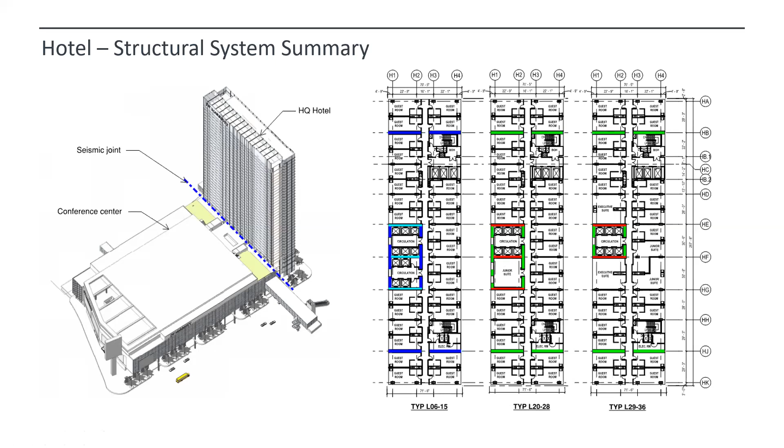Another project is a residential plus hotel building. This is an ultra luxury high rise, 750 feet tall. It's quite tall, has 55 floors, a crown, and 2 basements. The purpose of this tower was condos, apartments, and hotel floors.

Again, this has a really slim floor, with a 10.5 feet floor to floor height achieved. These are PT flat slabs with perimeter columns. In this case, the central core was not enough, so we made use of outrigger walls connecting the central core with the perimeter column. These are the tentative dimensions, 110 feet by 195 feet.

The core dimension was roughly 30 feet. If we just depended on the core for stability, the aspect ratio or slenderness ratio would have been 750 by 30, which is quite a lot more than 20. That was not enough, which is why we increased resistance by engaging the outrigger. Ultimately, the aspect ratio of the tower became 750 divided by 110, so that's somewhere around 7 to 7.5, and that helped.

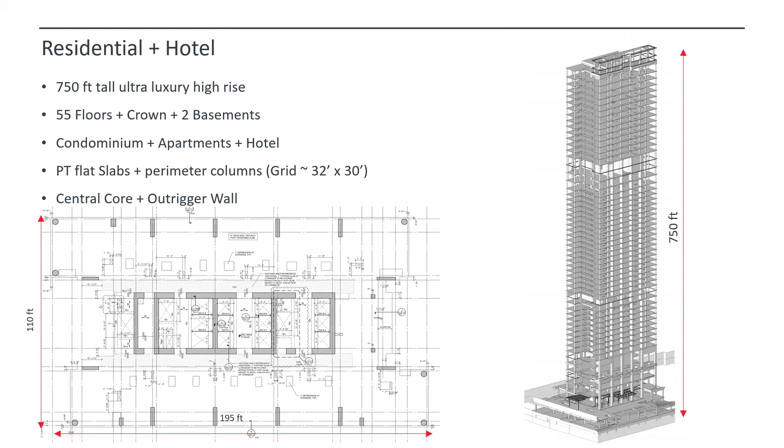This is a residential project. It's not really ultra high rise, but still a tall building, 90 meters tall. It has 28 floors and one basement. These are residential apartments.

Most of this construction is done using aluform. This doesn't have a flat slab, it has a beam slab system. Spans are in the range of 3 to 5 meters, but again really thin slabs, 5-inch and 6-inch slabs. In this case, primarily you have a central core coupled with these blue elements, which are the link beams, and then distributed walls everywhere.

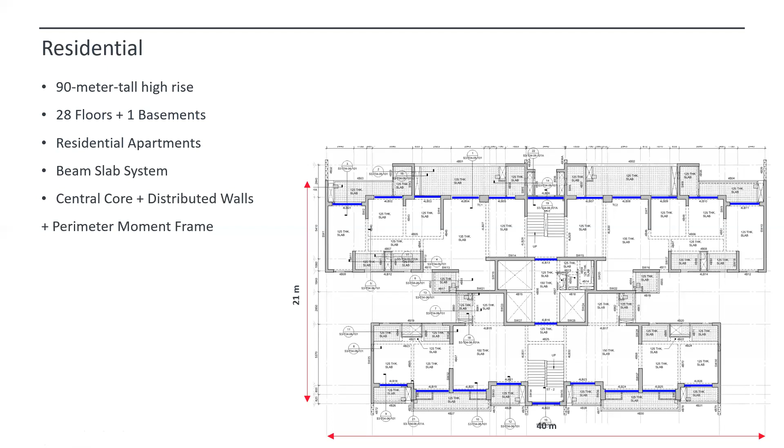Apart from that, to have good torsional resistance, you also have a perimeter frame. This perimeter frame helps in having good torsional resistance, and the distance between the two perimeter frames is roughly 21 meters. I think that's about it.

To summarize the presentation, what did we learn, or what were the structural cost and high impact decisions affecting structural cost that we need to take care of? First, obviously, have a reasonable aspect ratio, so that even if the core alone doesn't work, the building envelope is such that the engineer can use other measures such as outriggers, tubes, or moment frames, and get a good aspect ratio less than 13, or as per the table I presented in the tall building code.

The gravity and lateral systems, if you integrate them, linking them wherever possible, it helps in reducing the foundation demands. As in the case of outrigger buildings, the core is the lateral element, we connected it with the outrigger, the outrigger was another lateral element, and we connected it with the perimeter column. Once you integrate it, this helps reduce the demand on the foundation, and in turn helps reduce the cost.

Achieve symmetry as much as possible in geometry as well as stiffness over the height. Ensure that the tower verticals are equally stressed to avoid issues of tilt and differential shortening. If one side of the tower is more stressed than the other, the tower will try to lean on that side, and we don't want these problems. Constructing a leaning tower is costly, and we don't want that to happen. The center of mass needs to be as close to the center of stiffness as possible.

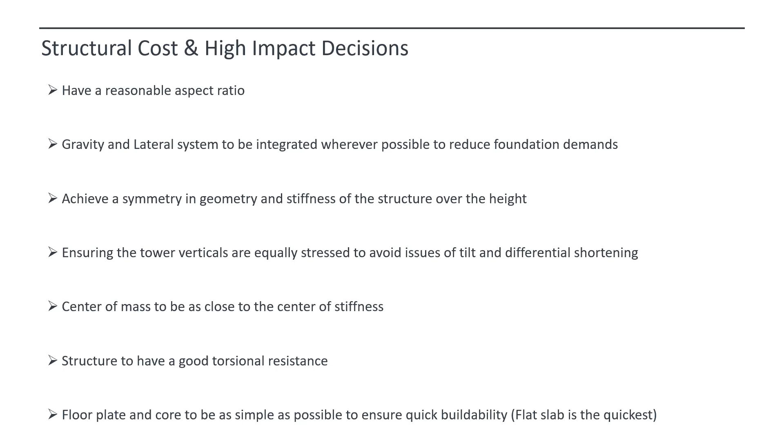This is one guiding principle where torsional effect can be minimized. A good resistance needs to be provided from the torsion point of view, with a good lateral system at the perimeter if required, and if the core alone is not enough. The floor plate and core need to be as simple as possible to ensure quick buildability. Usually, flat slab is the quickest; beams take more time to form, so a lot of time goes there. Flat slab is quicker to construct.

Avoid transfer structures, they add to the time as well as the cost. A lot of time goes into building a transfer structure. Also explore opportunities to jump form the core or use aluform. They are fast and quick. A 4-day slab cycle can be achieved in jump form construction, and around 7 to 10 days in aluform construction, or a mix of the two also works well.

From the partition point of view, the whole aim is to reduce the weight on the structure. Lesser the weight, lesser the quantity, and that's where lightweight partitions instead of brickwork help. The load is like 1/3 of the brick roughly.

External walls can be non-structural walls in concrete. They don't need additional plastering, so that plastering activity at the external phase is completely eliminated. One can also go for precast walls, precast hollow core walls for internal partitions. They are really lightweight. That could be an option.

Again, shape. When you're shaping the tower, you look at the lower perimeter by area ratios. They tend to be more economical. So before you try and do a cruciform shape, just make sure that you have exhausted all other possible shapes that are simpler. And once you have exhausted that option, then only go for a complex shape. It's not that complex shapes are not allowed. This is just what I'm saying dictates the economy.